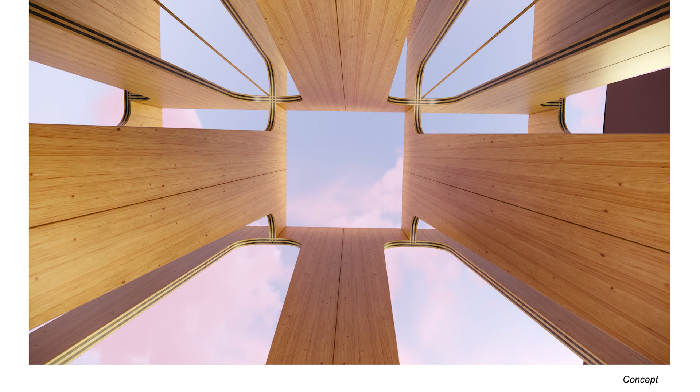So what we wanted to do was create or design an architectural installation that would activate the south lawn, create an experience of living within the forest, and the experience of actually being in a forest - verticality, framing of the sky, direct connection to the materials.

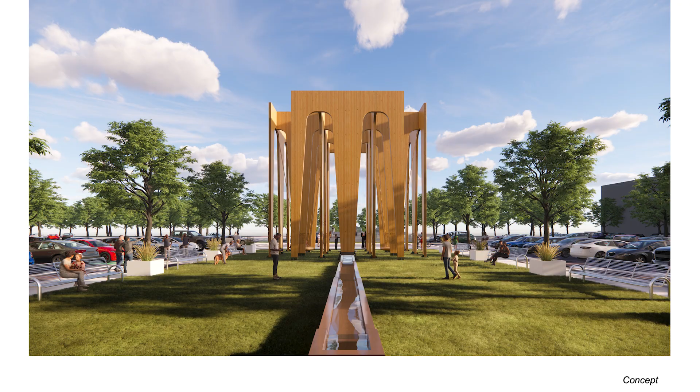This is a great view. Hold right here for a second. This even starts to speak to, you know, when you're on the highway going 80 miles an hour, and you see the managed forest and the planted forest, and that kind of rhythm that starts to be produced. So we're kind of playing a game there as well.

Next slide please. So here you can see where the piece is going to be situated. This is all made out of 5-ply CLT.

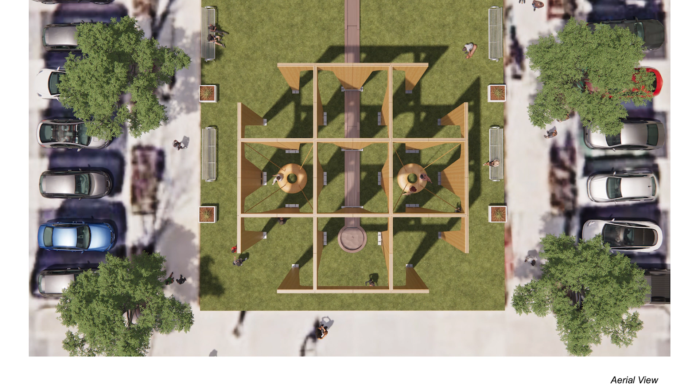Next slide. There will be 2 or potentially 4 swings, and then we'll have other programming - it's obviously a 3x3 design. We'll have other programming in the other cells, but also the south, the 1x3 row at the bottom also creates a proscenium that frames a performance space that will be activated, in concert with the amphitheater across the way.

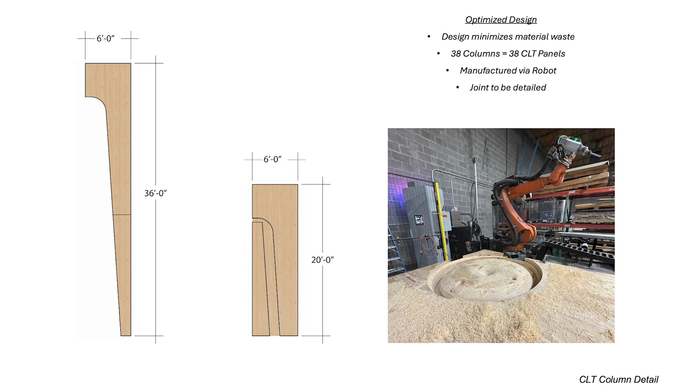Next slide. This is in my studio. This is my - we call her Daenerys, mother of all dragons, because she can mill wood and she can breathe fire with the plasma. It's really pretty cool. It's an 8-axis robot that we use to fabricate a lot of our pieces.

So here you can see we're nesting this geometry in a typical CLT panel that can then be spliced in the middle, so that we have a kind of efficiency of production. Next slide. Okay, this should be an animation.

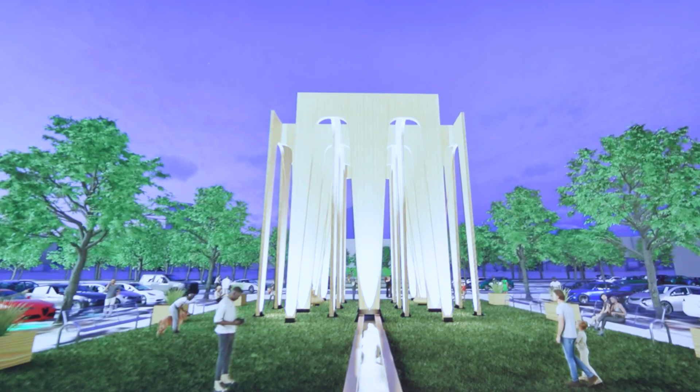So here we'll see the piece at night and the way in which you can activate the lawn at Ponce City Market. Each of the panels - we're going back and forth with Michael Phillips, who's the president of Jamestown. We either are going to have text that talks about each of the species of pine.

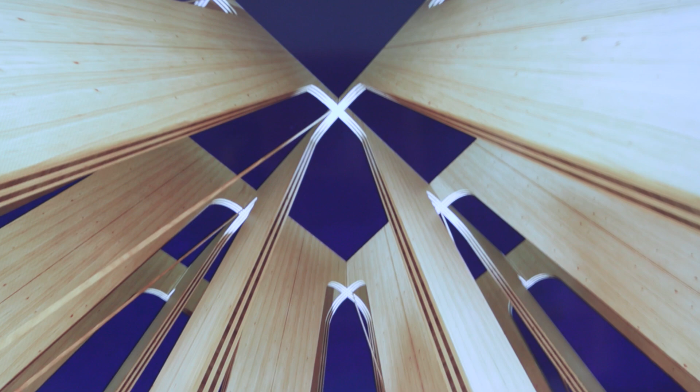This is all pine, juvenile pine in South Georgia. Either talking about the species of pine, or what we thought could be fun is to work with poets and have them write little poems about the forest and about trees. So we're playing around with those different ideas. But you can see the way in which it would be activated at night.

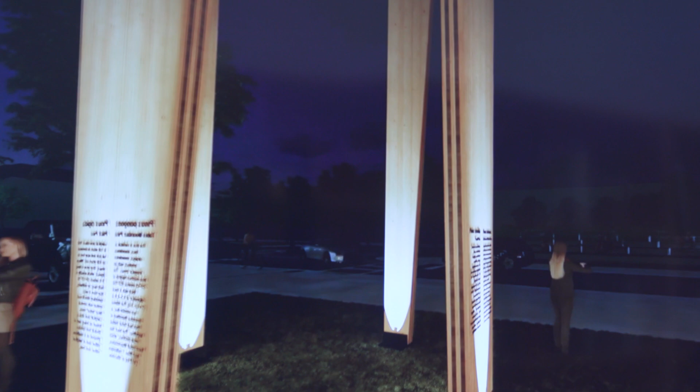Has anyone here worked with CLT on a project? Amazing material - it truly is amazing. So much potential. We've had a lot of clients interested in working with it.

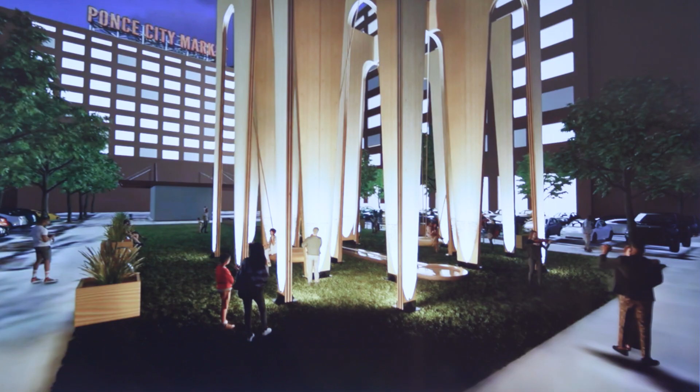But so far no. What's the hesitation? I think they don't know enough about it, and they're all waiting to be the second - they don't want to be the first developer to do it. But now there are a few projects, at least 2 or 3, in Atlanta.

And there's a local source too, which is important. T3, and then this one. And that was a big part of what is motivating both Jamestown and the GFF - nobody wants to be first, nobody wants to be the earliest adopter of something like this.

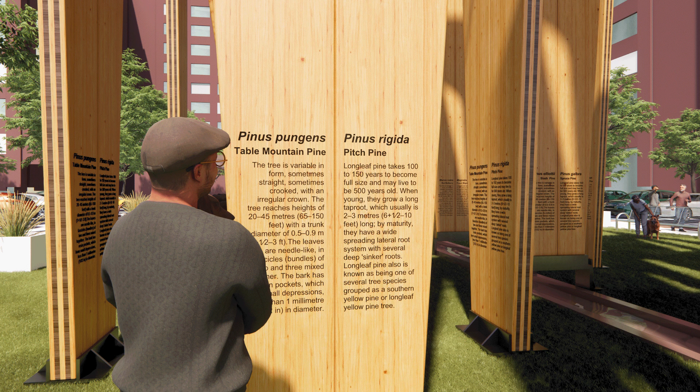How tall is that? This is 36 - the cube is 36 by 36 by 36. It's a beautiful piece. Thank you. And you can keep going. This goes on, yeah, keep going, next slide.

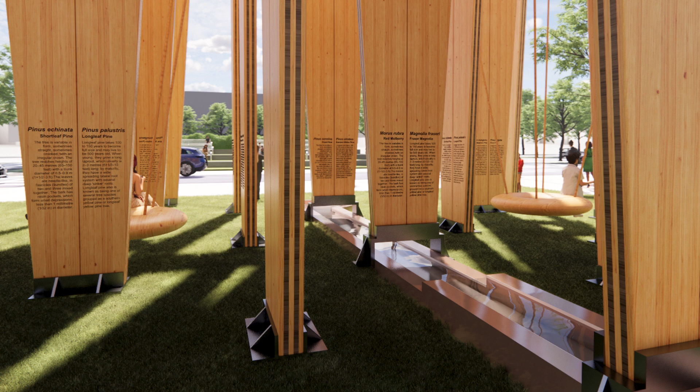This just gives you a sense of the daytime activation. The swing, by the way, is a lot of fun - you should go out there and check it out. It was even more fun before. We had to put in some hard linkages at the base, but before we had a soft linkage that kept it from crashing into the walls, and it was like riding a snowboard - so smooth, it was fantastic.

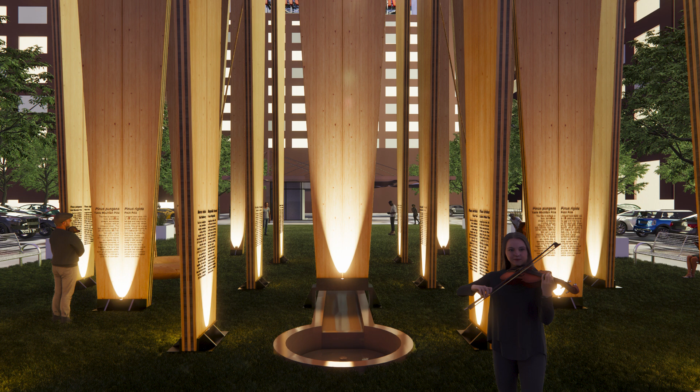But those grommets kept wearing out, so we had to put in a hard linkage.

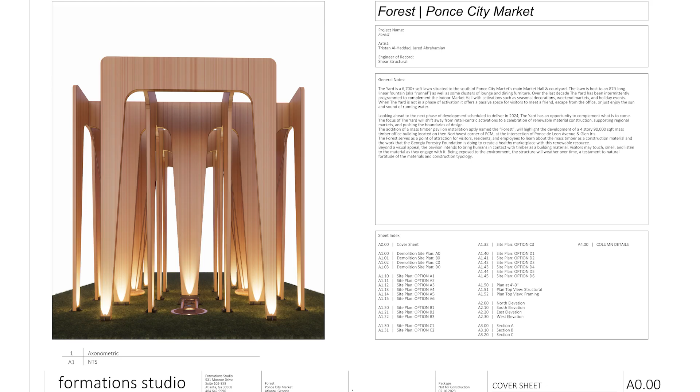I think we were asked to give a little blurb or thesis on what we wanted to talk about, and what I want to talk about is the word automatic, whatever that means. I'm using that as a provocation, a foil for the conversation. Automatic can be defined as self-moving or self-motivated. Wood is very much automatic. If we're going to talk about the future and AI and all this sort of stuff, then wood has to be part of that conversation, because wood is automatic.

You put a seed in the ground, and 80 years later, wood will soak up all this carbon, so you don't need all this technology to do carbon capture. It just does it. It will provide habitat. It will provide beauty. It will provide experience. Then you can harvest it and use it and store that carbon for 500 years if done properly. So that's automatic in my mind. That's the future. I guess we'll come to this at the questions, so I'll stop there.

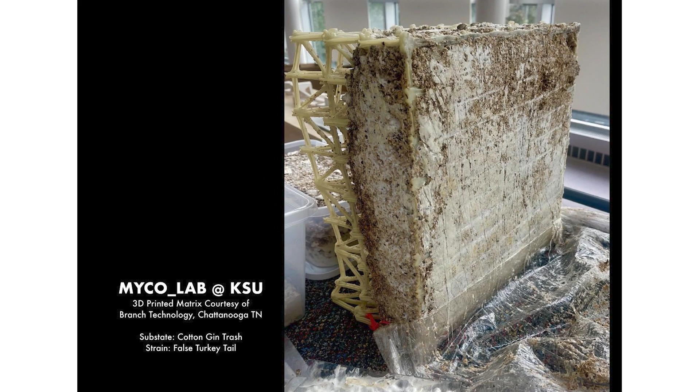This was one experiment that I did. So Branch Technology, which is in Chattanooga, does this 3D matrix, double curvature walls. Years ago, for MYCO_LAB, they gave me one of their panels. So I called them up and said, do you mind if I use it with the mycelium and see what happens? And they said excellent, because they're looking for biopolymers. They use standard polystyrene that's blown through this 3D matrix. So this is one experiment that I'm going to continue with them as a collaboration.

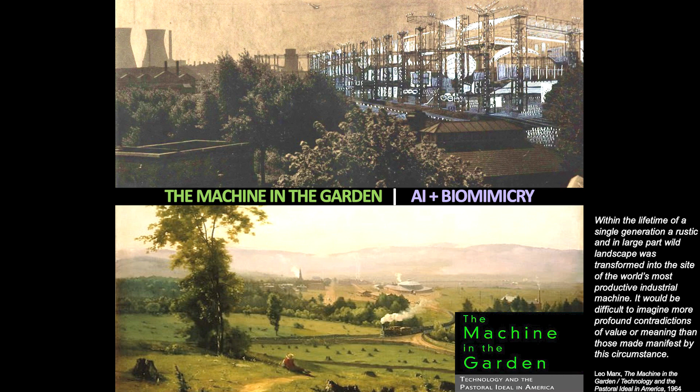This is about a competition that was titled international, called AI and biomimicry - two topics that I didn't know a lot about. I was a little anxious about both. And the provocation toward the end is going to be about that.

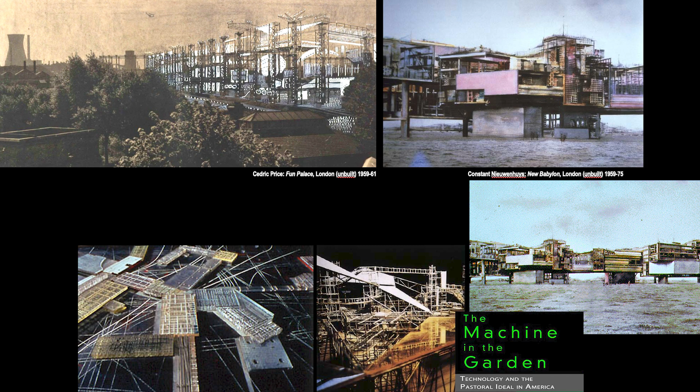We know about artificial intelligence and some of its potentials and its anxieties. And biomimicry is a term about nature and what Michael and Tristan have been talking about, natural materials and environmental issues. But the term biomimicry has many insinuations, and it sometimes sounds like mimicry is more shallow, more superficial about nature. It is, in fact, meant to be a very deep dive into not just the look of nature, but its processes. Really, 60 years ago - I'm going to show you some history here.

A great book by Leo Marx, The Machine in the Garden, was kind of that dialectic - in other terms, the machine for the industrial and the digital, and the garden for the biosphere. So Cedric Price, whose Fun Palace is shown here, was one of the first visionaries, proponents of cybernetics and the influx of the machinic into our built environment, so to speak, and designed things that weren't necessarily built, but were anticipating this friction between that which is technological and that which is natural.

And so this was a prior studio, but this became a bit of a running idea through our studio as we were taking on AI and biomimicry. So next, what you'll see also in a previous one was dealing with the machinic and the natural, and its prefiguring. Again, some of this is going to sound more pessimistic than optimistic.

I'm going to try to put both out as provocations - that in fact the intrusion of the machine, like the locomotive in that first painting, into our natural habitat would have in fact degrading consequences, say the Horizon oil spill just not that long ago.

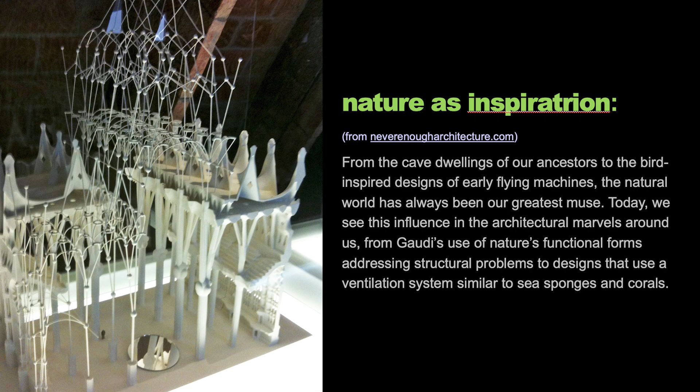So again, the next slide - we were looking at some of these, but this competition was to be very excited about the future. It takes as its premise nature as inspiration, again from the cave dwellings of our ancestors to the bird-inspired designs of early flying machines. The natural world has always been architects' greatest muse, and today we see the influence of these marvels around us, from Gaudi's use of nature's functional forms addressing structural problems, to other natural systems, ventilation systems similar to sea sponges and corals. This was sponsored by the Gaudi Foundation, by the way, so that was a kind of inspirational, exemplary predecessor to this.

So those were the two premises, and this was a competition that had online remote sessions with experts in both these fields. There was Grimshaw, Herzog and de Meuron, Zaha Hadid's office. They all had people speaking to these issues.

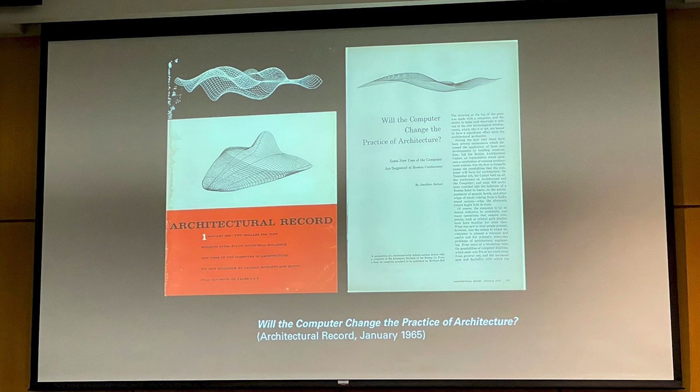This showed, in fact, what you're going to see as an article at the end of this with almost the same question, but this one way back in '65 asked, 'Will the computer change the practice of architecture?' It was already being put out there as this great revolution and possibility, but potentially also a great question and challenge to us.

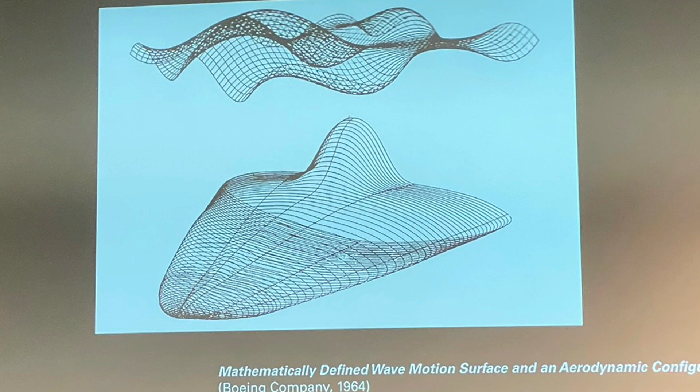In this case, a parallel industry so to speak, the Boeing aeronautics industry, was mathematically defining wave motion, surface, and aerodynamic configurations for the optimization of aircraft and things like this. This became, in fact, the same industry that CATIA under Frank Gehry's pioneering use was modeling form for aerodynamics, but then became modeling for architecture.

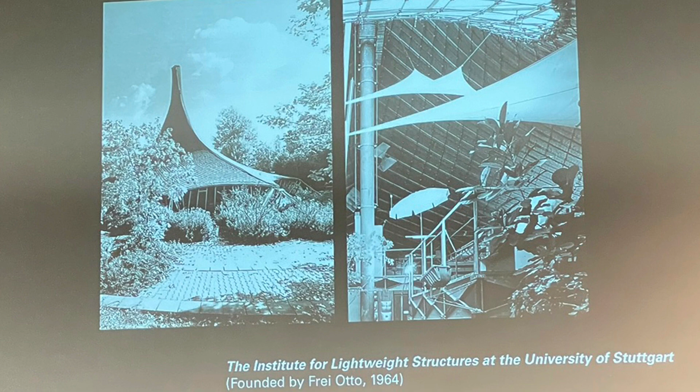So we go to the next one. And in fact, again, in some very serious but very wonderfully festive and fun formal investigations by the engineer and architect Frei Otto, back in 1964, you see the physical manifestations of these possibilities where the science of aerodynamics and geometry informed a lot of architectural form.

So this was a premise that we looked at for the insertion of the computer and AI into ours.

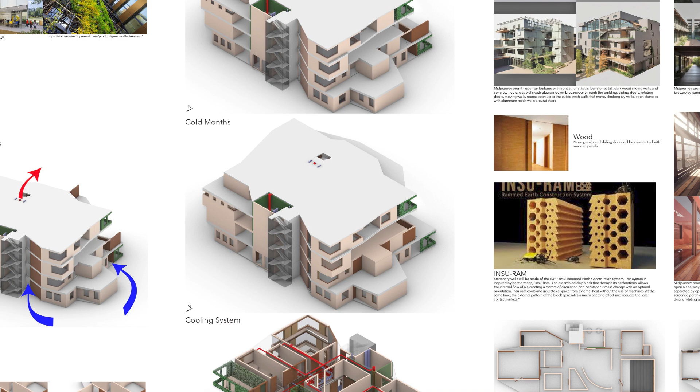So if we go to the next one, you'll start to see some of the students' work now, and this does not look particularly biomimetic in that regard. This was, if you go deeper into the termite mounds and understand how the cellular systems work for heat cooling differentials and ventilation. Ed Aiken was there for this entire process, thank you for being here today and for being part of our studio workshops and reviews, helping us do all this.

His practice and enterprise right now, Cove Tool, was a great tool offered for the students to use to test these propositions about performance, nature's performance, not just its look. And sometimes it does take on the look too, we're going to see that in just a minute. So this is one example.

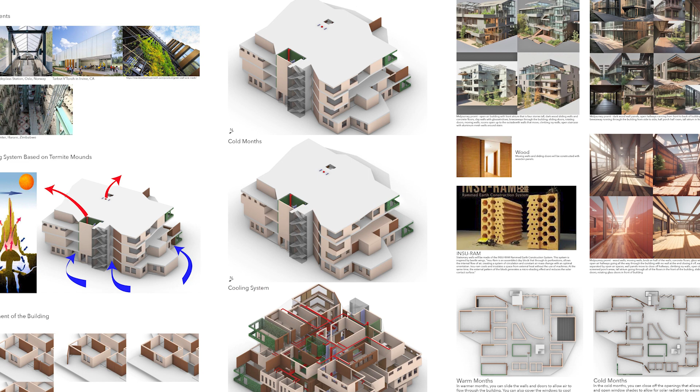If we go to the next one, this is now a quick survey of the ones that won the competition. Again, this was international, there were thousands of entries. They are very stunning visualizations of lots of possibilities, and many of the students took on deeper substantive evaluations and performance testing of these ideas. But for the most part, I was struck by how pretty much all the winners seemed to emulate more natural, organic, biophilic forms that grow, not necessarily what we associate with architecture, but increasingly we may well be doing that.

So we'll go to the next one, you'll just see some of these. I'm not going to get into all the details, but you can see they were sited all over in places with very challenging climates that they dealt with - rainfall and water remediation, solar harvesting, passive ventilation, shadings. It turns out natural forms are often just more intrinsically able to do that - in this case they can collect water as plants do, and architecture can collect and distribute similarly.

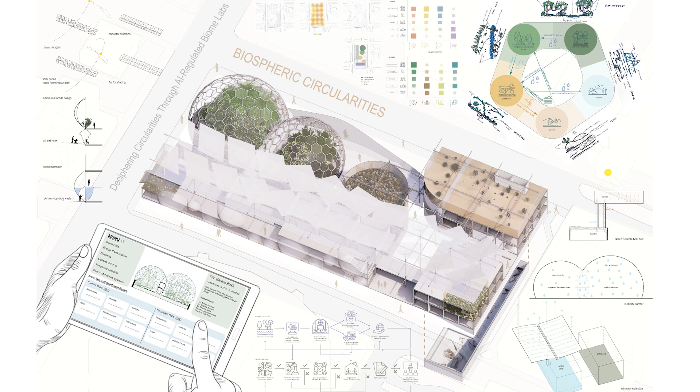This one did not take on literally as much the biophilic forms or biomimetic forms. They took AI to be more performance-oriented, and used Cove Tool and Climate Studio and others to really test out the propositions in these circular economies, how this could become a lab for different kinds of climates, could learn to reciprocate.

The biggest idea I put in personally was how do communities of organisms work, not just single ones. The collaboration and supporting reciprocity of communities in the forest, trees and their roots and abilities to share and distribute things. They wanted to see how that kind of circular economy, shown in the upper right, could happen for a lab at Georgia Tech to test these propositions.

Even though we only have one climate, seemingly a very hot one right now in Atlanta, to have these simulated or different habitat biomes, as they call them. We'll go quickly through the rest because I do want to get to my provocation. Biospheric circularities was their proposition, with lots of study and depth and research into that. Teresa Lee and Kobe Harris, I should mention, the two great students—they're seniors and just graduated.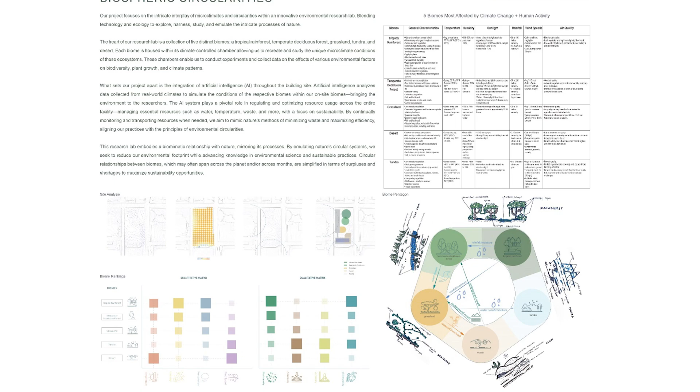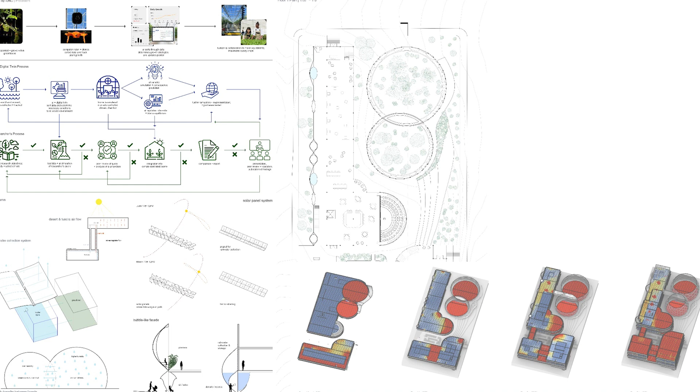This is some of the heat mapping for performance from the Cove Tool and other tools they used to really dig deep into the science of their propositions.

They got into, I still think, some beautiful architectural visualizations, just not quite as explicitly biomimetic, I think, in the eyes of the jury. So we got comments back.

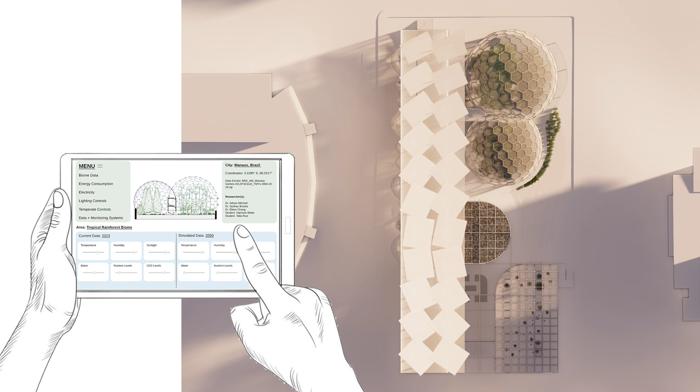Again, they were using AI as an ongoing tool about the processes of being able to take lessons, learn lessons from these different habitats, these biomes, and apply them to see what processes could be active in helping climate sharings between these biomes.

I'll end with this one. This came out at the same time, an article about AI. It asked, will architects really lose their jobs to AI? I also teach the practice course studios, and that was their big question—why are we sitting here learning about business practicing architecture in today's day and age? It's going to be radically transforming as we get automated out of our work by AI.

They were very anxious, and there are many—what we should talk about tonight—many in this article are quoted as saying to be mindful and concerned about some of its negative possibilities, the automation of what we currently do as humans, but it mostly landed on saying, let's not jump to the conclusion. Let's see what, in fact, its beneficial opportunities can be.

So I'll leave with that provocation. We'll be talking about all these issues. It's really a fascinating time we live in, at a crossroad. Thank you.

Thank all of you. That was fascinating. So we're going to start with a few moderator questions for me.